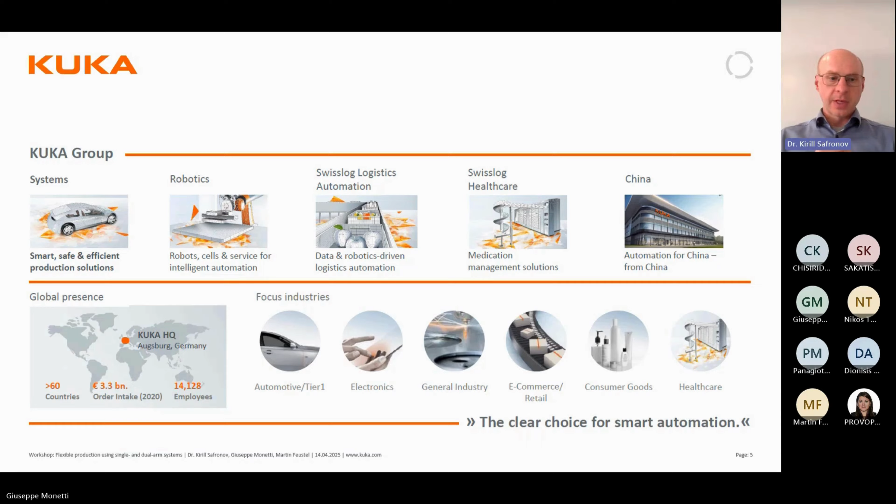Almost in every country we have representatives, sales, and services, but as I said already, the headquarters are in Augsburg.

Right now we have several European projects, and one of these projects is SMARTHANDLE. The KUKA tasks here are multi-arm motion planning, how we can organize the work of several robots together, also path planning, task-based programming, how we can make programming easy to use through task descriptions.

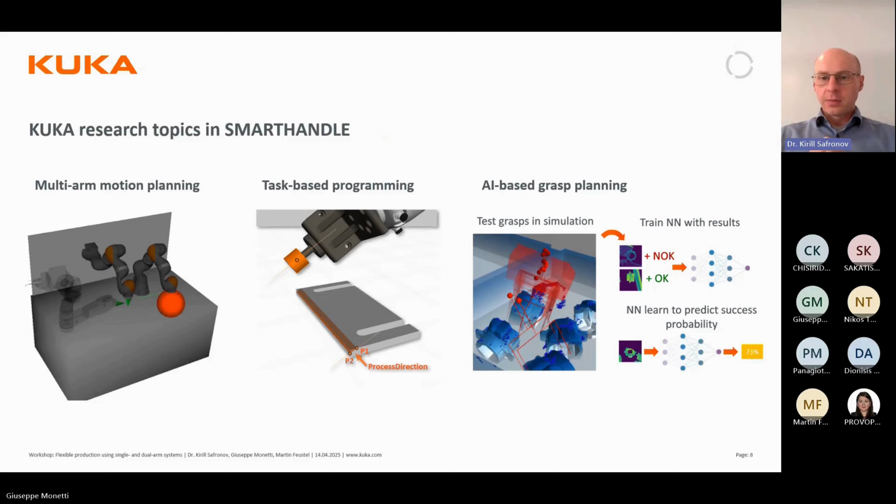And AI-based grasp planning, how can we increase the grasping ratio, the grasping success, not just for industrial objects but in general. Now I would like to hand over to Giuseppe, and he will continue with the first part, dual arm system for aluminum profile handling. Thank you.

Perfect, thanks. I'm starting to share right now. Okay, so I'm Giuseppe. As Kirill introduced me, I'm going to present our work and results in the field of dual arm manipulation, in particular for a specific use case referring to the SMARTHANDLE project.

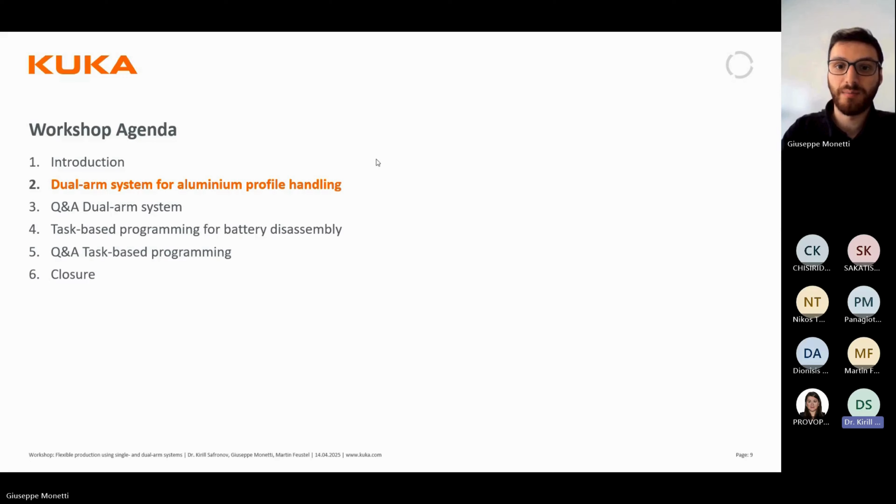That is the one provided by the company Alumil. Alumil is a Greek company, and they are working on production of aluminium profiles of different shapes and different lengths, which then have to be packaged, palletized, put on a pallet, and transferred for delivery.

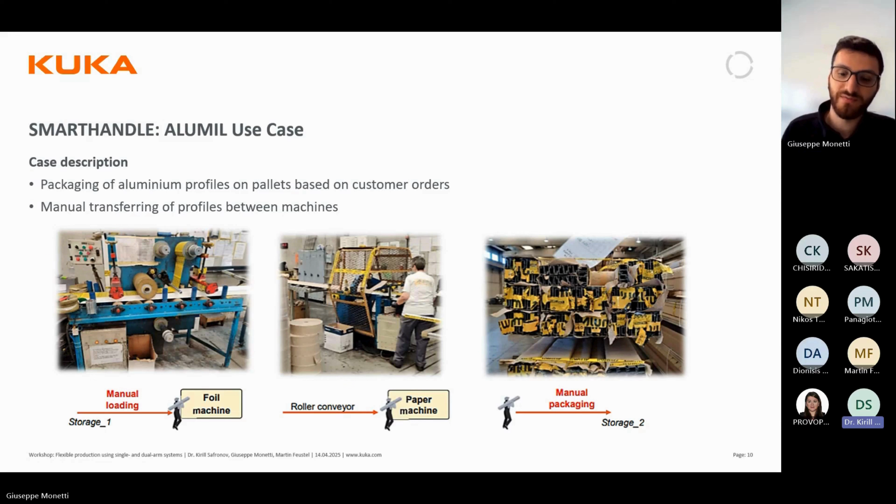Most of these steps are nowadays still done manually by humans, and our objective is to approach the automation of these processes. To do so, we developed a test bed for our technology that we are going to provide to our partner inside the project.

We set up the current scenario that you can see in the picture. We are using two LBR iiwa robots that, as Kirill already said, are cobots for industrial use cases. These particular robots have 14 kilograms payload each. In our scenario we have two of them with two robotic grippers, each with 3 fingers.

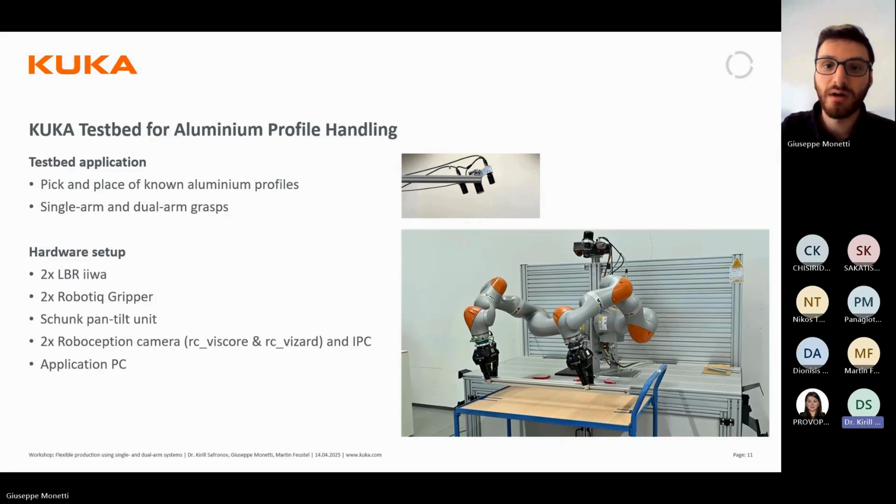Together with two cameras from Roboception: the rc_viscore that is looking from far away on top of the working area, and the rc_vizard placed on top of the torso. This second camera can also be moved using a pan tilt unit from Schunk. Finally, we have an application PC that we can use for deploying and testing all our technologies.

This is what I'm going to explain, how we are able to perform the task that you are watching right now: to autonomously grasp the aluminium profile, recognizing the pose of the profile itself, the grasping, the repositioning, and placing.

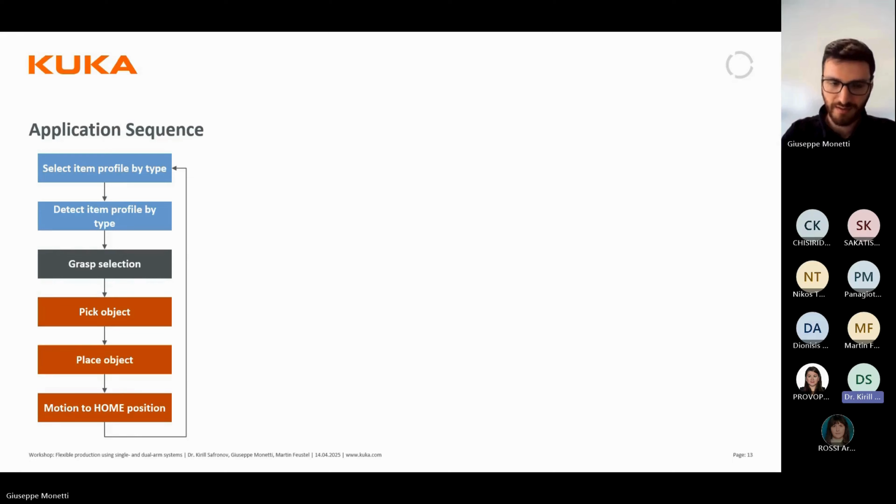The application follows the sequence that you can see here. So we start with a selection of the aluminium profile. This aluminium profile is selected using a small web UI that we developed internally for this use case. We need to specify the profile that we want to handle together with the camera that we want to use.

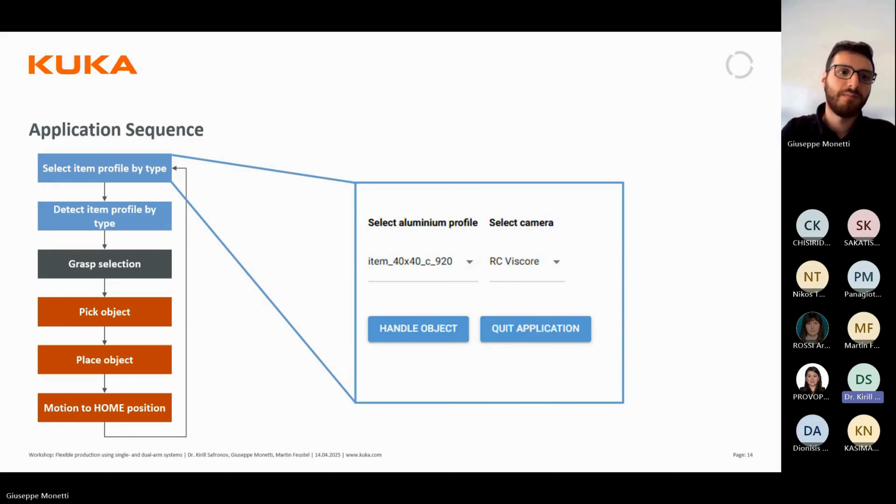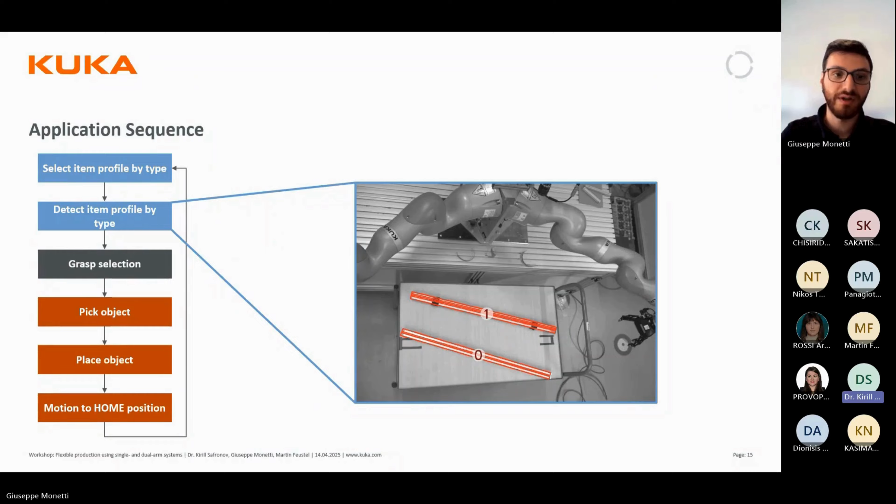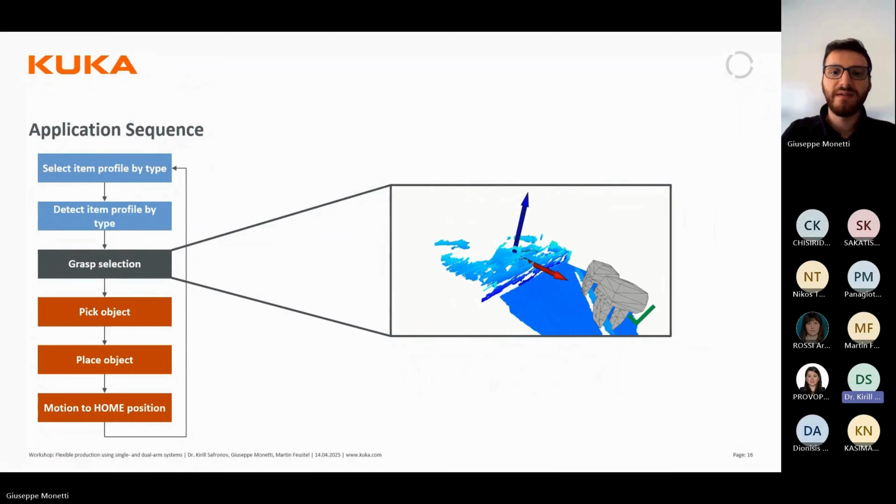After that, we proceed to the detecting phase, in which we find and estimate the pose of the profiles that are available in the scene. After that, we select how to grasp the object, and these steps will be clearer, of course, in a while. But yeah, so we decide how to grasp the object. And finally, we plan and then execute the motion that you already saw in the videos before. So we go on the object, we grasp it, we actuate the gripper as well, and so on.

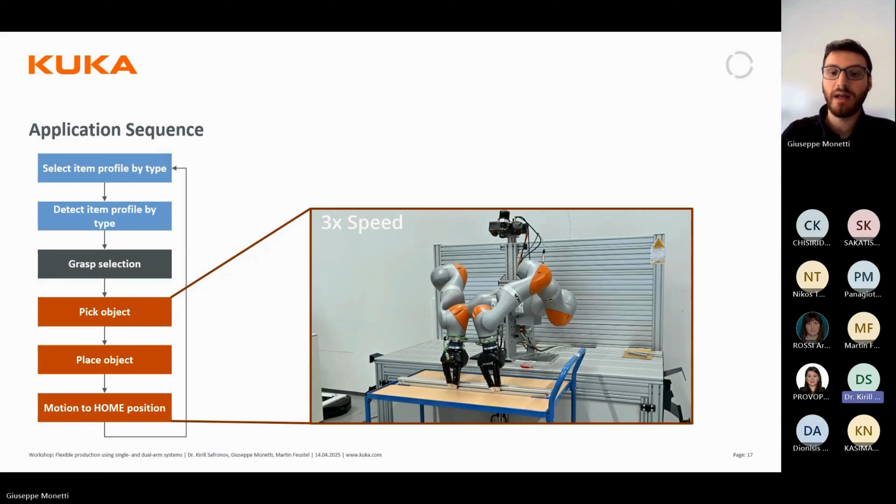So let's start describing part of this application. Let's start with the perception part. Regarding perception, we are encapsulating into a service the Roboception CADMatch functionality. This is a technology that Roboception allows to use with their camera to get the pose of objects that are previously learned by a model that they train on site.

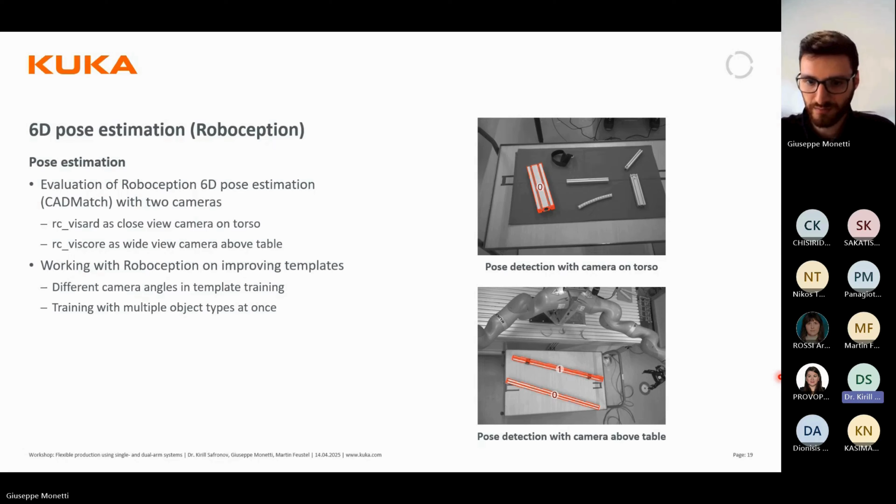So the procedure is we send a model to them. They train their AI model such that they can find the pose of this object in the scene, and then we can deploy that on our system. And we are in a close collaboration with them in order to improve the templates that they give us to recognize the object at runtime.

Then let's talk about the grasping pipeline. So the grasping part is divided mainly in two components, the grasp sampling and the grasp evaluation. Why are we dividing these components in two? Because we can decouple these two logics and try to pre-compute as much as we can. So for example, in our scenario, we have the grasp sampling that happens only once and only at startup. So it's something that does not have to happen at runtime and can take even longer time.

The technology used for grasp sampling will be briefly shown. Here we are using them to generate grasp poses, so configurations of our gripper, and storing them. Then at runtime, what we do is to take some runtime information like the point cloud and the object pose, together with the grasp poses that we sampled and stored beforehand, and we have, after all, a sorted list of grasp poses. They are sorted in terms of score. So the grasp pose that has the highest score is for us the best grasp that we are going to try to perform.

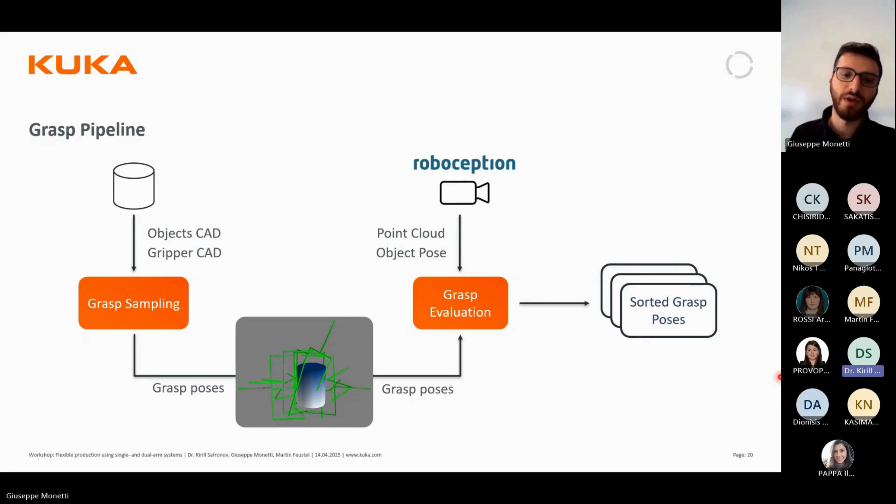And this is how a grasp, for example, may look to us. Assuming that we are having a parallel gripper, our grasp is defined in the object pose and is object relative. So the grasp itself can be computed using only the information on the gripper and on the object. How are we sampling the grasps? Well, we are using two different methodologies. One, the simplest one, is the approach sampling.

The approach sampling is based on a very simple situation. We take the object mesh and we sample points on the surface of the object. Then we approach this point with the approach axis of our gripper, and we try to check if the object is between the fingers. If this happens and there is no collision, perfect. We have a grasp sampled for this object.

A methodology that is a bit more complicated but also gives better results is antipodal sampling. In this case, we are still taking our object, the mesh of this object, and sampling points on the surface. But then we use these points: in particular, we sample one of those and compute the normal of that point on the surface of the object. Using this information, we can try to project this point on the other side of the object.

Why? Because we are trying to find two regions of the object that can be used together for grasping, so a region on one side and another region on the other side. If we are able to find two regions like that, it means that we can approach these two parts with the two fingers of our gripper. And this is how we sample using the antipodal methodology. We then use these grasps only if there is no collision between the gripper and the object itself.

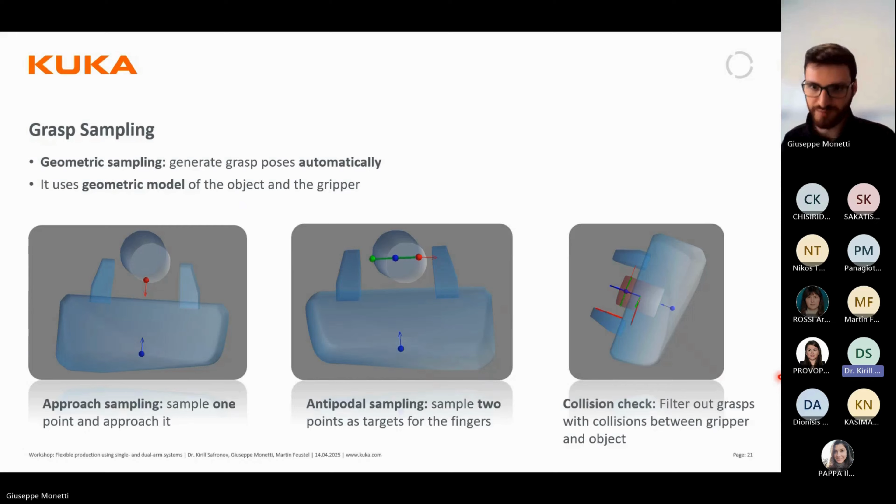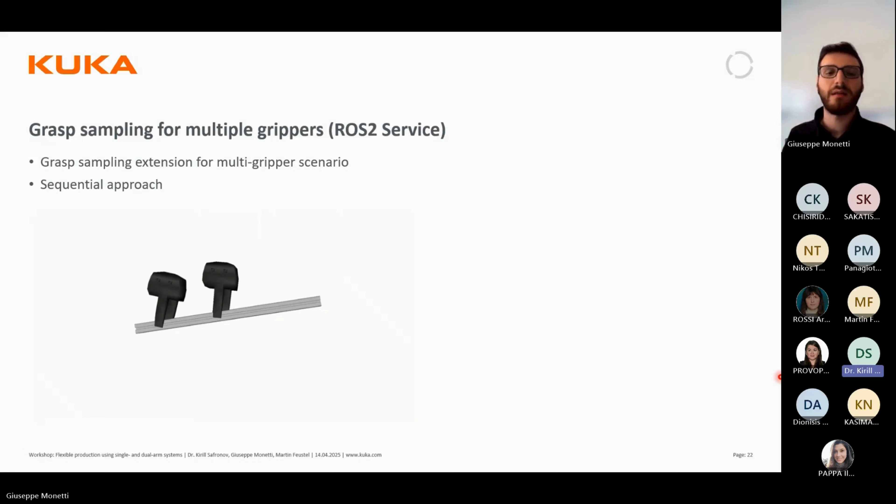The approach that I just explained works just fine for one object, but how do we enhance this approach with multiple grippers? For example, in this case, you can see some grasps sampled for this aluminium profile. The way we do so will be shown in this simple flowchart. We start with loading the object model, and using the object model, we load also the gripper, and we try sampling one of the poses of the grasp.

This means we can use one of the methodologies that I showed before, the antipodal approach or the other approach. After we sample the grasp pose, we check if we are in collision with the environment. What do I mean with environment? In this first part, I mean simply the object itself. So we are checking if we are in collision with the object.

If we are not in collision, we proceed to add the gripper to the environment. So we have sampled one of the grasp poses of the gripper, and we then proceed with the sequential steps. Otherwise, we try again with the same gripper. If we finished with all the grippers, then we are good to go. But if this is not the case, we add the second gripper and we start again.

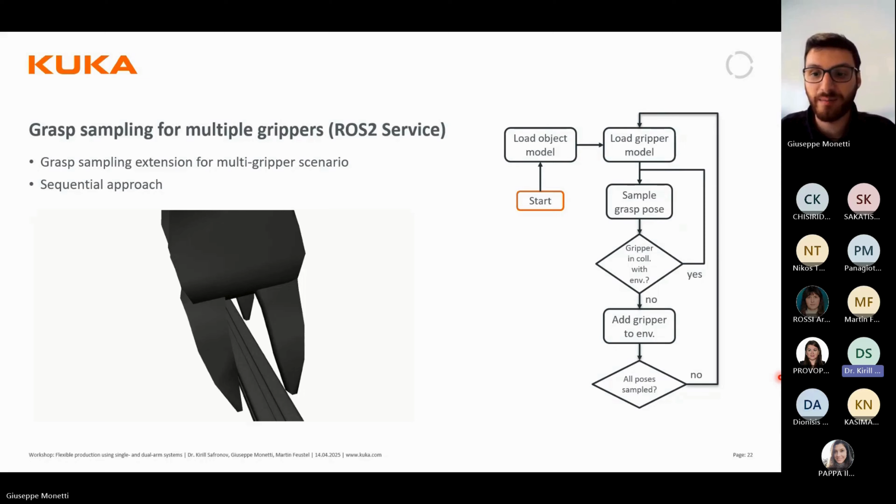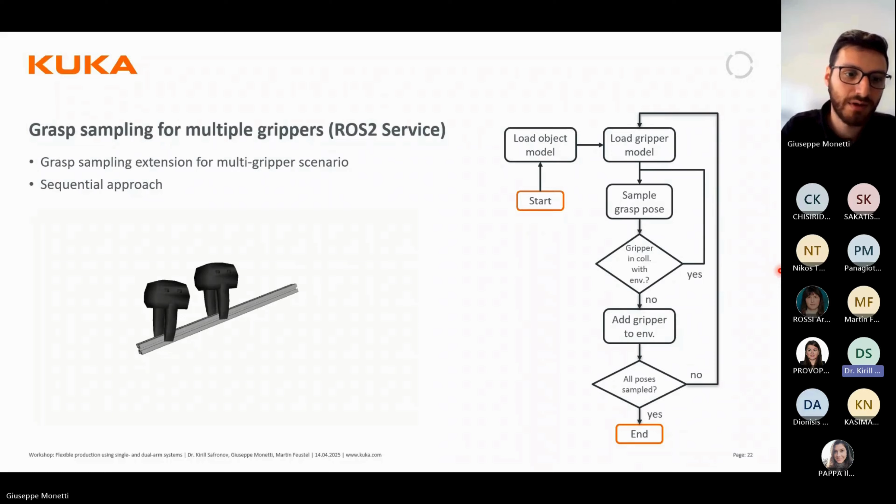So with the second gripper, we sample some poses and we check if it's in collision with the environment. In this second case, the environment is represented not only by the object, but also by the first gripper. And this is how we finish the algorithm. If we sample a pose for each of the grippers required for the grasping, then we have our multi-grasp sampled.

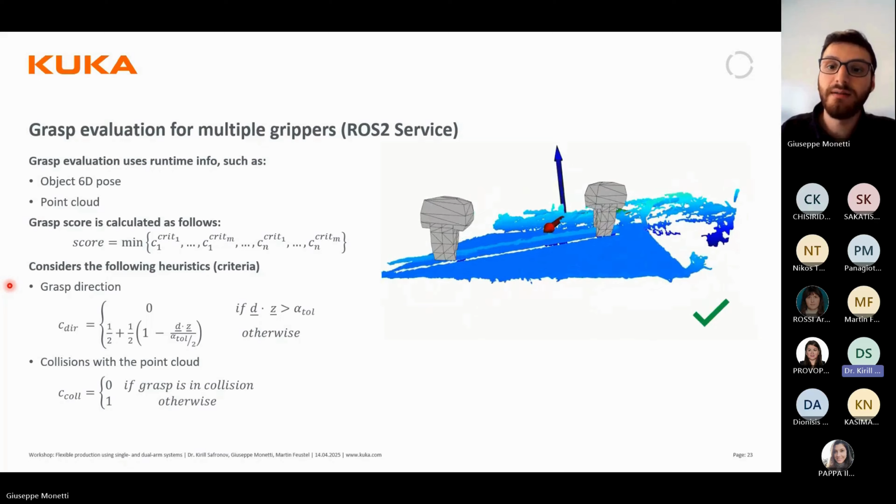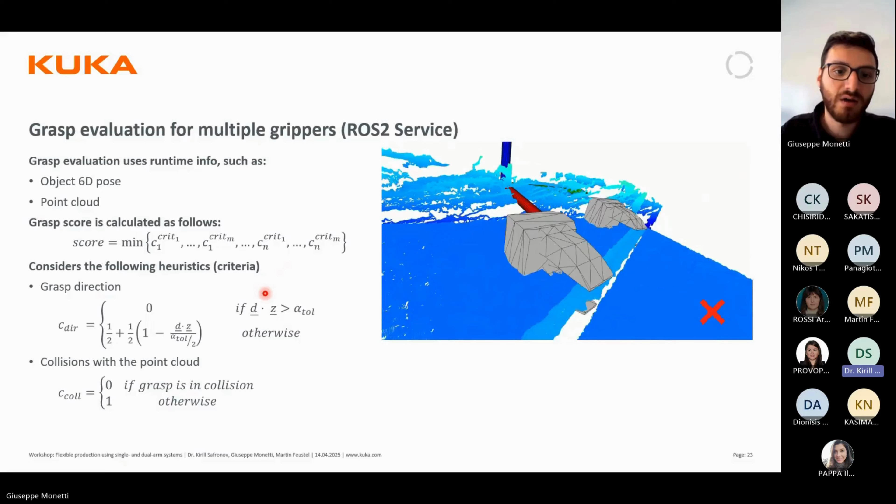The criteria that we are considering right now are the grasp direction. We define a desired direction D, which in our case is the z-axis that you can see in the videos here, the blue axis. That's the direction that we would like to grasp from. Given that, we assign a score of 0 if we are approaching the object from a completely different direction, and we check it via a tolerance. Otherwise, we compute the score using the following equation.

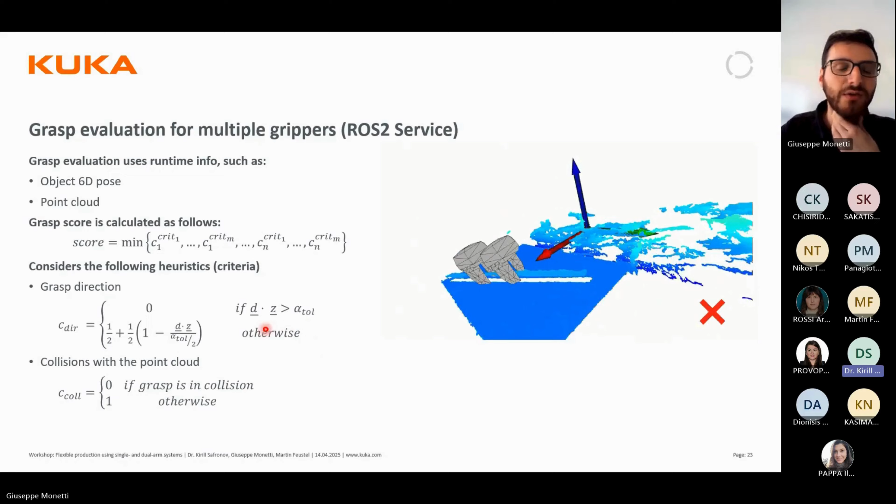It is a linear function of the angle between the approach axis of the gripper and the desired direction. This score goes from 0 to 1. The same applies for the collision. We have another heuristic for that.

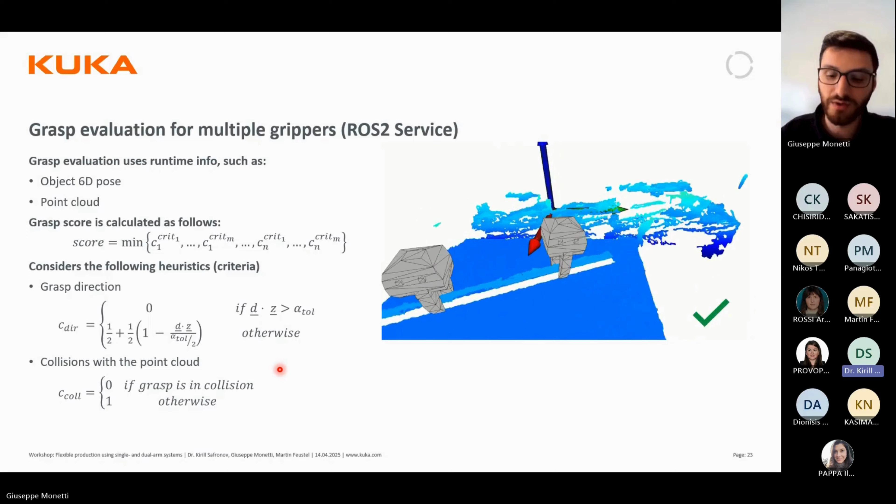That is very simple: 0 if the gripper is in collision, 1 if it is not. In this way, we are able to find grasps that are aligned to the direction that we would like to have and are collision free. Of course, other criteria can be added, and we are working on that, like, for example, the stability of the grasp or the weight distribution, and more.

Then, after we decided which is the best grasp for the object, we have to plan the motion. For doing so, we use two components. The first one is inverse kinematics. We know where the gripper should be placed, but actually we don't know which joint configuration for our robot is the one achieving that pose of the gripper.

So what we do, we use a quadratic programming-based inverse kinematics approach. So we use a QP solver to find the desired configuration of both manipulators. And then finally, we use Open Motion Planning Library, OMPL, to plan a collision-free motion from the starting pose to the grasp pose.

OMPL contains the implementation of plenty of sample-based algorithms, like for example RRT or PRM, and all the variants, for example also RRT star. Moreover, we can check for collisions and also do some distance checks if we need distance information using libraries like FCL and Coal.

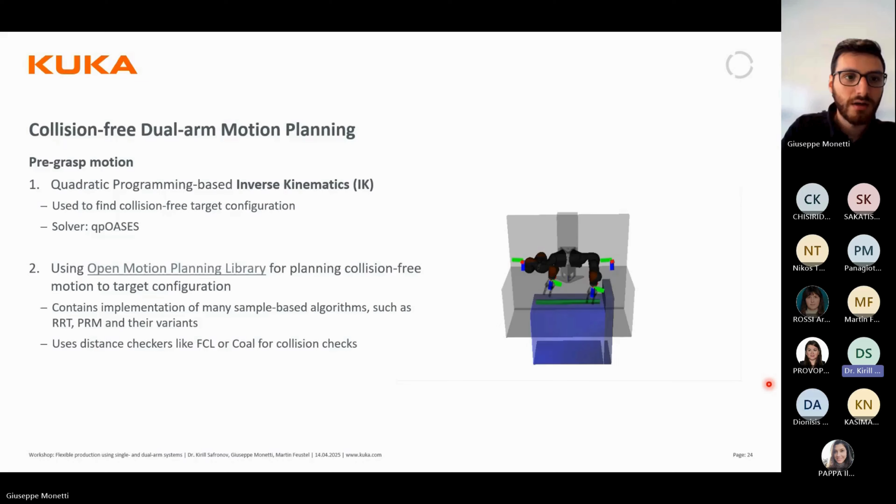But the QP-based approach is not used only for the inverse kinematics, but also for the final part of the motion, or the part that is nearer to the object. Once we have a motion that is collision-free and is above the object, what we would like to have is to go down straight to the object itself.

To do so, we are performing a linear trajectory, and we are injecting a trapezoidal velocity profile on top of this trajectory. Again, it is a Cartesian trajectory, so we need to find joint configurations that are able to perform this Cartesian space trajectory. To do so, again, we use our QP-based approach.

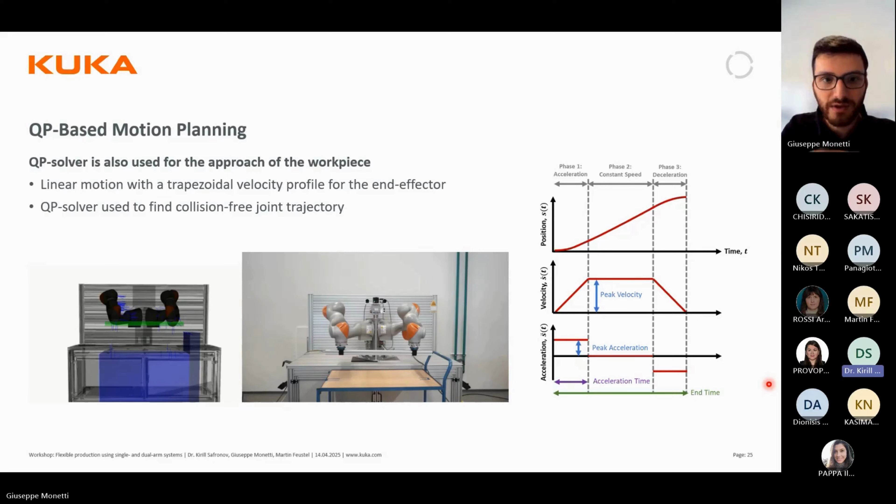More details about the QP-based approach, and in particular how to enforce Cartesian constraints, will be addressed by my colleague Martin in the second part of the presentation.

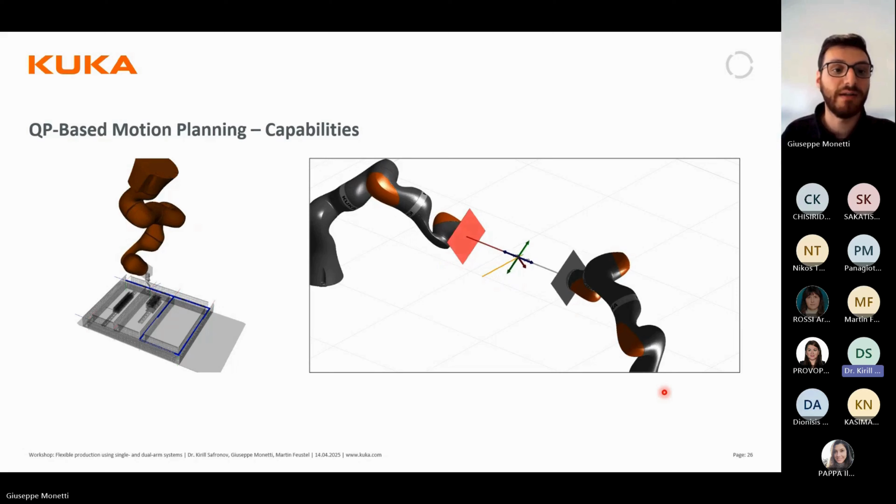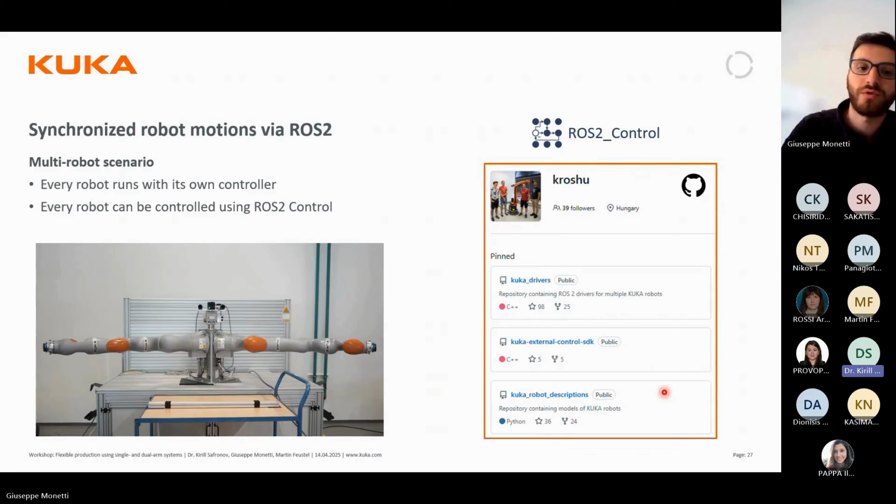Then finally, when we have planned all our motions, we are ready to execute them. To perform that, we use ROS2, in particular the ROS2 control framework. And we are using the open source KUKA drivers developed by our colleagues in Hungary. They have the set of libraries that you can see on the right side on GitHub, and with minimal adjustment, it is possible to use this library for synchronized execution of motion on multiple manipulators.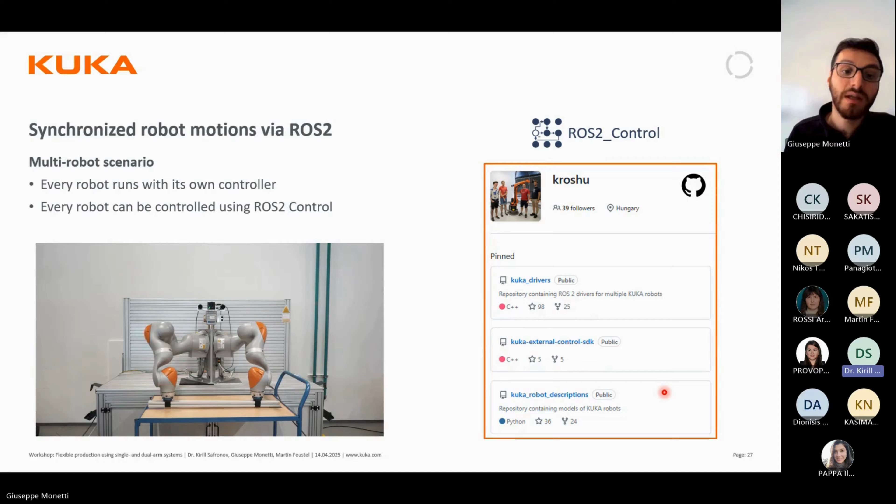Why is this important? Because simply we are not in a scenario in which all the robots are connected to a single controller. Every robot here is controlled by an individual controller, and that means that it's not guaranteed in every moment that the motion is synchronized. But using the tool developed by our colleagues, together with ROS2 control, it is possible to perform synchronized motion on multiple manipulators.

We are working on several parts. One of those is the motion planning. We are planning right now motions individually for each manipulator. So even though we are using them together and we are planning the motion together, so we plan joint values for all the robots, we are not planning this independently of the robot itself. We would like to plan the motion, for example, of the aluminium profile, and then independently of the kinematic chain that we have, we can perform the motion.

To do so, we can use our QP-based approach together with some other technology that our colleagues are working on, in particular the ScLERP algorithm, that is a screw linear interpolation. So using screw theory, it is possible to interpolate frames such that they're consistent along the motion.

An example of the problem that may arise using simple linear interpolation is shown in the figure here. So if we define two different frames referring to the same object, and we interpolate the motion between some key points, for example here, A1, A2, and finally A3, we can simply interpolate those frames and have a Cartesian trajectory out of it.

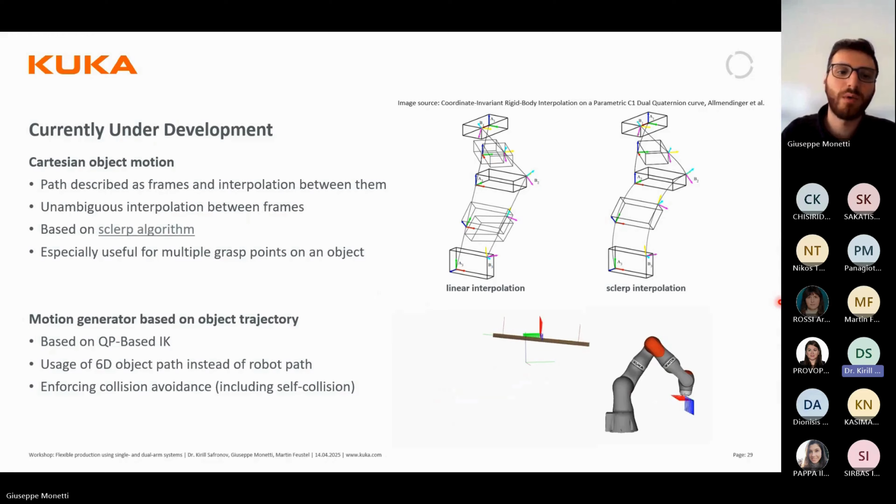What you see here on the bottom part is some initial promising results using this interpolation technique in simulation. And we are going to integrate this into our setup. Finally, what are the challenges that we are going to address in the near future? One is the pose estimation.

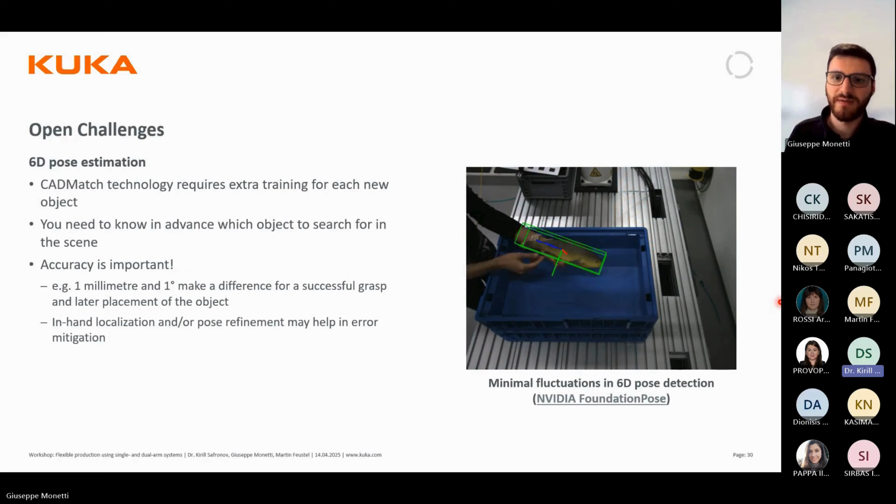So the CAD-match technology provided by Roboception is based on the CAD model of the object itself and requires training every time we want to manipulate an extra object. So it means that we have an overhead every time we want to add an object to the set of objects that we want to handle. To solve or mitigate this issue, there are several approaches that can be found in literature, but moreover, another important problem that we want to address is the accuracy,

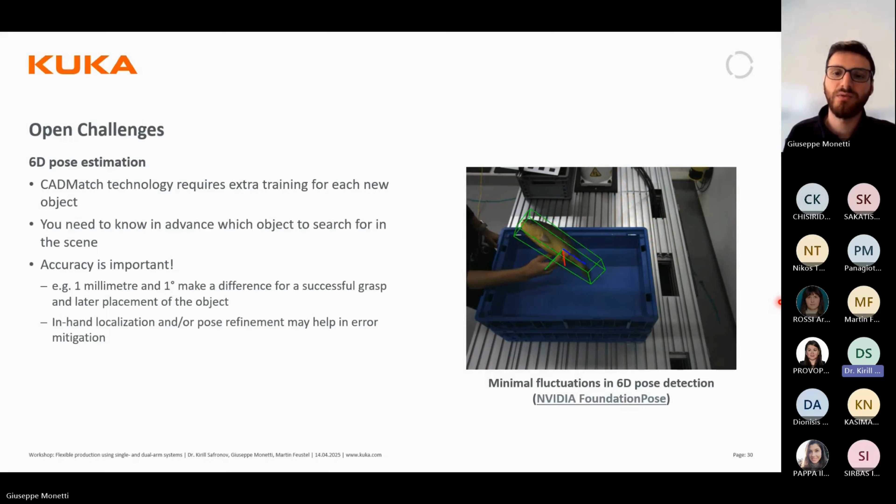because some error in the 6D pose estimation of the object may lead to a wrong or an inaccurate grasp strategy that brings them to an inaccurate placement of the object into the placement position. And that is, in our case, an important problem to address.

Then also the grasp sampling itself is using right now, as I showed you, geometric-based technologies. We are working at this moment on evaluation of several AI-based solutions. Why? Because AI-based solutions may reduce the amount of grasps that we need to sample to have sufficiently high quality of the grasp itself.

Because what can happen? It can happen that we have sampled, I don't know, 100 grasps or 500 grasps for a specific object, but by luck, all those grasps are then not of high quality. What do I mean with high quality? Well, it depends. Right now, we are checking only for collision in our sampling, and it means that the grasp itself may be not stable.

Using zero-shot technology or few-shot technology, like the one based on diffusion models, can improve the average quality of the grasp itself and also reduce the runtime cost for evaluating them.

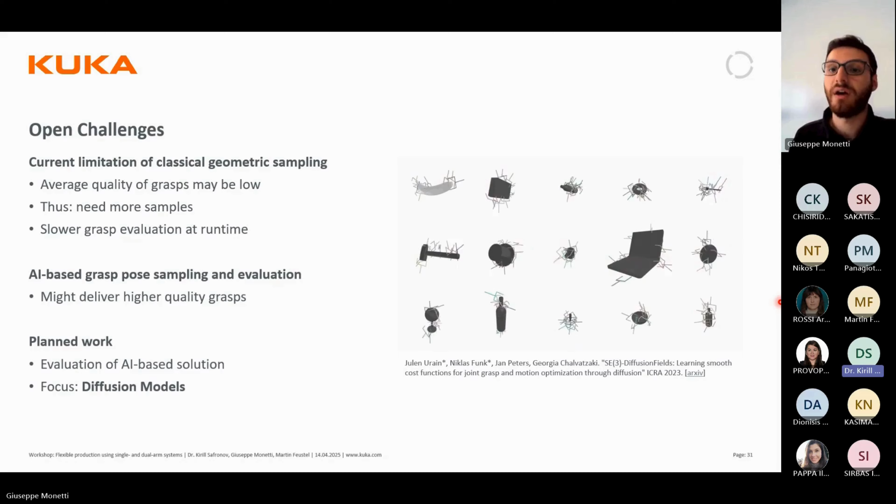Finally, we are trying to tackle the problem of deploying robot applications also in a modular and innovative way using a service-based structure. That's something that is more than known in web applications and in several domains, but in robotics it's getting more and more useful. But this implies also problems.

For example, in a simple monolithic application, okay, we have a big monolithic complex application, but the component is just one. Here, when we have several components, as we showed you at the beginning of this presentation, we have also the burden of maintaining the communication between them, and we have the complexity of the networking as well. And it then gets harder to debug one of those individual components, one of these services itself.

Moreover, we need then orchestration. That is a new task, something that can be approached using, for example, solutions like Kubernetes that help, for example, ensure availability of the services, and this together with Docker may make it possible to have reliable applications, where if a component by any chance crashes, we can make it turn on again and available to the user again.

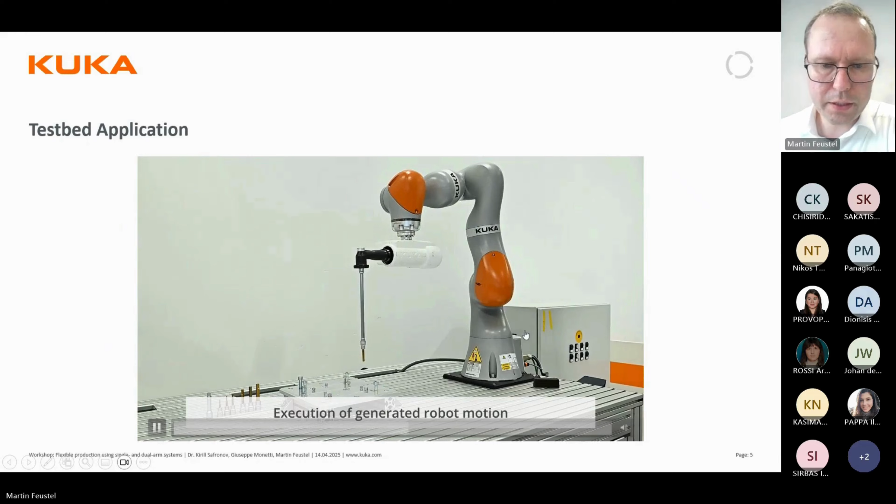So it's starting. What we are doing is moving to one of the screws, moving down, and after that we have a retreat motion. The screwdriver is currently not actuated, but this will be done in the future, by the end of the project. And as you see, that's really quite simple.

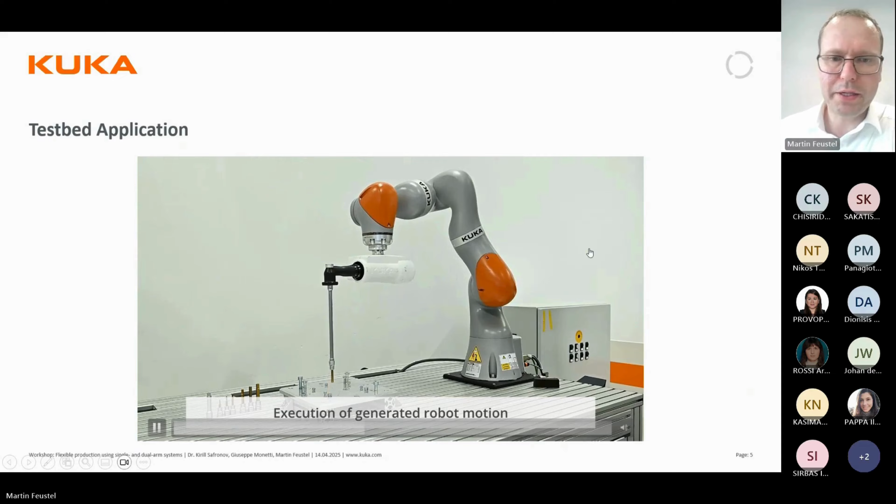So if you ask an application developer, he will say, okay, I do that quite easily. How that's done and what we really have behind for the motion generation, I will explain in the next 20 minutes.

So you have some PTP and some linear motions, and that's how you normally program the robots. This is the standard way, not only at KUKA, but also at ABB, Fanuc, and so on.

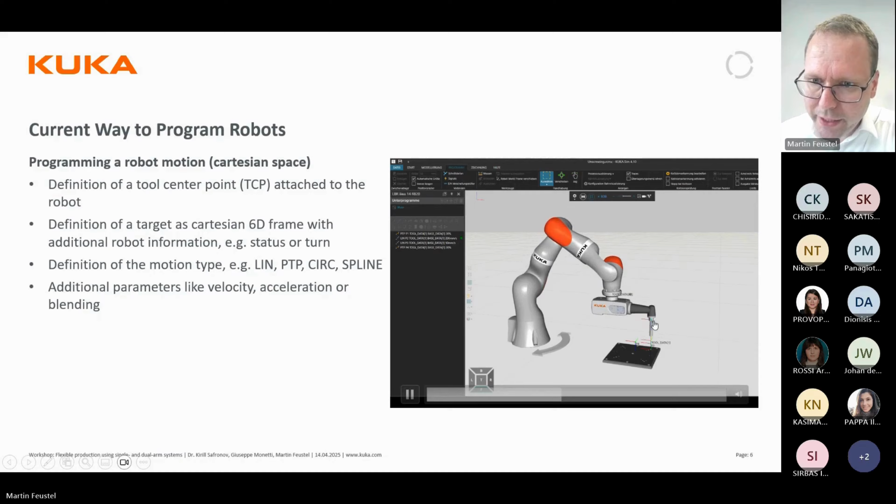So the main thing you are doing is teaching frames. You are defining the motion types, so linear motion, circular motion, PTP in joint space. And you also have additional parameters like velocity, acceleration, or this blending, so it's not directly reaching P1, but blending over to the next motion.

So if we look from above in an abstract way, we have the complete path here, we have the tool we want to move along this path, and then we have these frames. If we make it a bit more complicated, we start here, our TCP is currently here, and then we continue, and then we are at some point, and then what happens very often is we cannot perform the motion.

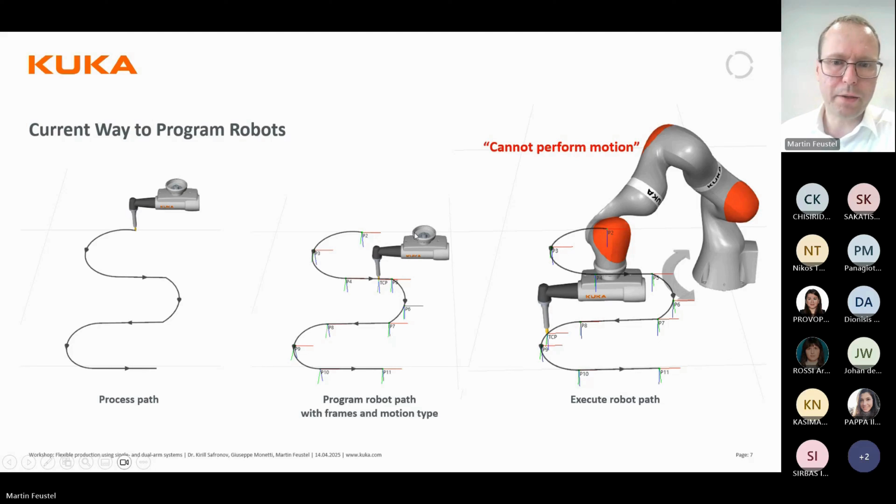The reason for that is that we are reaching the workspace of the robot, or even more, the axis limits. So it's not possible to move to the next point on this path. And that's very sad for the application developer, because if you are here and you cannot execute this motion, you have to start here and reteach all these points. This is only 3-4 points, but you have to redo it until you find a solution that you can execute completely.

The reason for that is that this programming we are currently doing is over-specified. So I have one screw here, and we want to reach it with one frame. And if I rotate this screw now, I cannot even reach this screw or bolt anymore, because it's out of the workspace of the robot. The position is the same, but the screw is rotated around, or the bolt is rotated around 180 degrees.

And that's the issue. We don't need this rotation around this blue axis here. We don't care about that, but we have to care while we are teaching it. And additionally, because we have here a 7-axis robot, we are additionally also teaching more than 6 axes, more than this point here. We need additional information like this elbow and the tip, what angle this is, because we want to reach this point with always the same orientation and the same robot configuration. For that, we have to teach this point, this frame, as a 6D frame plus robot configuration.

And this makes it, of course, very inflexible for processes. So if some parts are rotating, we are not using some robot redundancies, or here, process redundancies - I will explain that on the next slide. And we are also not using CAD information, so we are also not using collision avoidance. We program, and then at the end, you deploy it on the controller and check by hand if it's in collision or not.

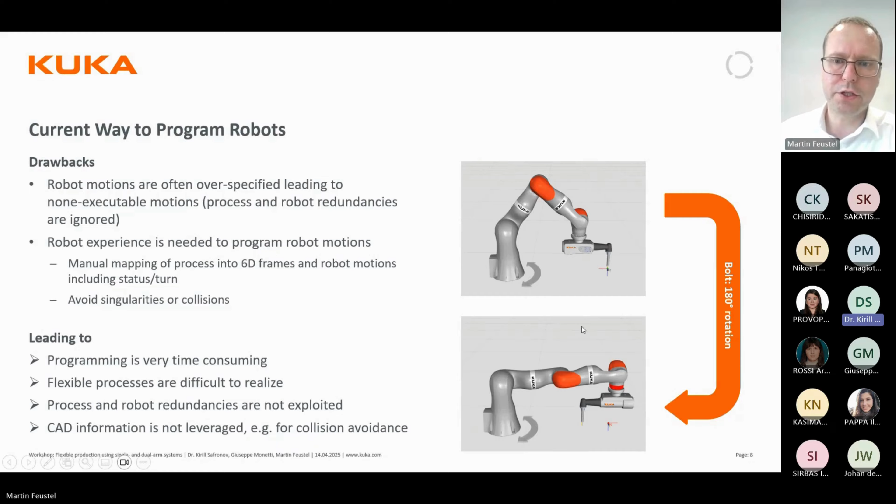So about this redundancy: robot redundancy means that you can reach one frame here, at the top of this bit, with multiple robot configurations. This is possible if you have a 7-axis robot, or if you have a 6-axis robot with some rotation tilt or linear axis, or if you have a mobile robot with an arm on it. So this happens quite often.

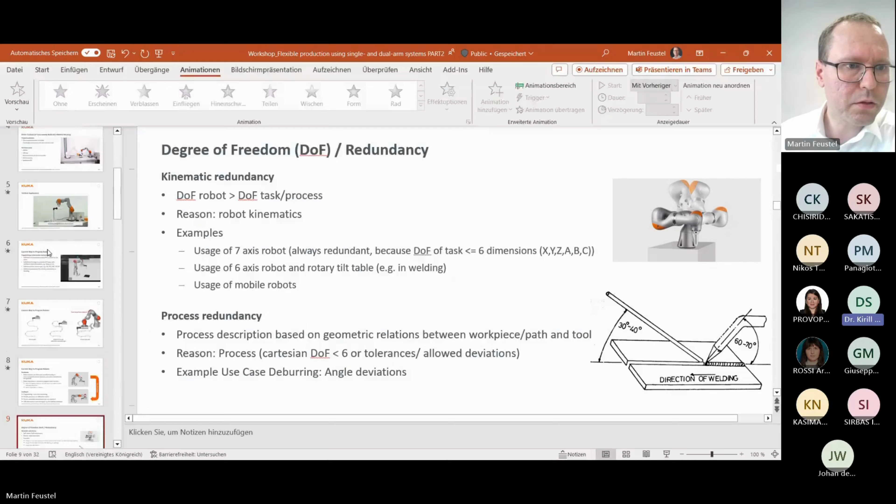But I had it. So what we did then is, we said okay, if the frames are limited, then let's unlimit this frame. So it's possible now to say, okay, that we are moving.

This is really, I have some technical issues now. Sad. Let me see. I'm not sure why they are not working.

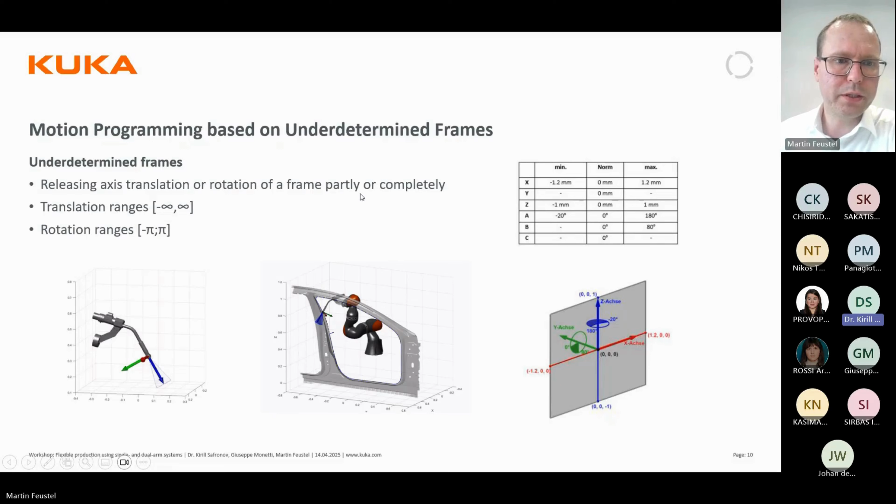What we did is we say, okay, it's now possible to have these ranges. So around B, it's possible that we have some rotation, or X and Z. More processes are there that we can free them. So one thing could be that we are in this range here, and it can be somewhere. This is possible, but this has also some limitations, this programming style with underdetermined frames.

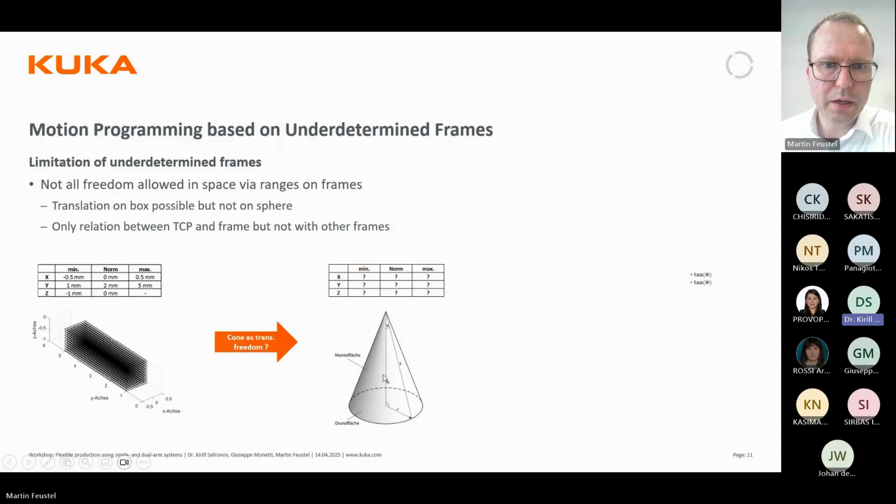So if we want to describe that your TCP is somewhere inside this cone here, how do you then write this? You can only say X, Y, and Z, this is what your frame is. And then at the end, you have some equations inside. And this is nothing we can give to a user.

So for simple use cases, it's possible to have some ranges for X, Y, Z, or A, B, C. For example, in our use case with unscrewing bolts, we can say the rotation axis in the Z direction, in the direction of the bolt, is unlimited, and then we find more solutions. But if it's getting more complicated, it's not a solution.

For that, there are some research institutes doing it differently. They have programming techniques based on constraints, especially geometric constraints. So what they want to do is put a bearing on the stuff here, and what they are selecting is coincidence. They're saying the bearing must be coincident with this stuff here.

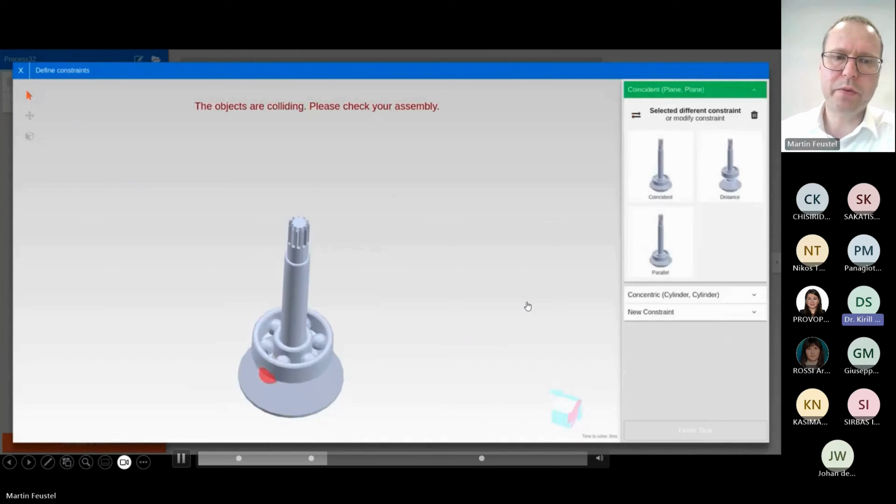And with that, they are describing some constraints, and these constraints automatically generate a path. So you see it here, we have a robot. First thing they are doing is closing the gap between simulation and reality, so they exactly know where the objects are. And then they generate a path out of these geometric constraints.

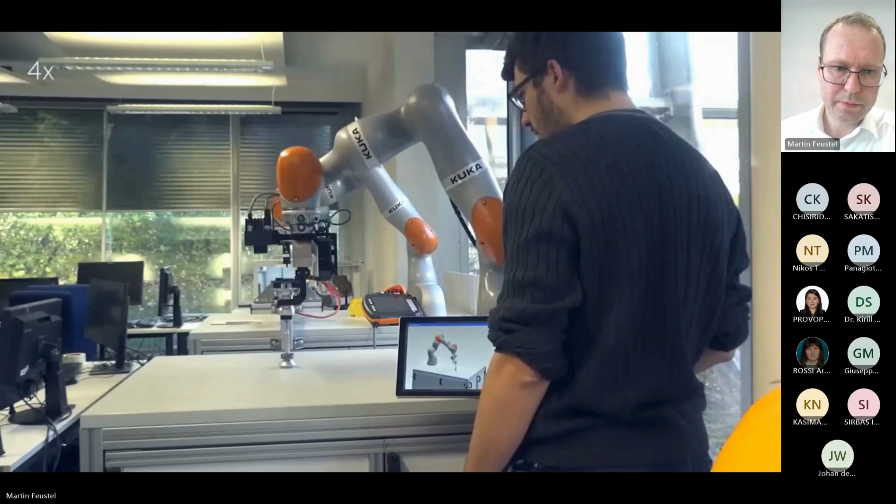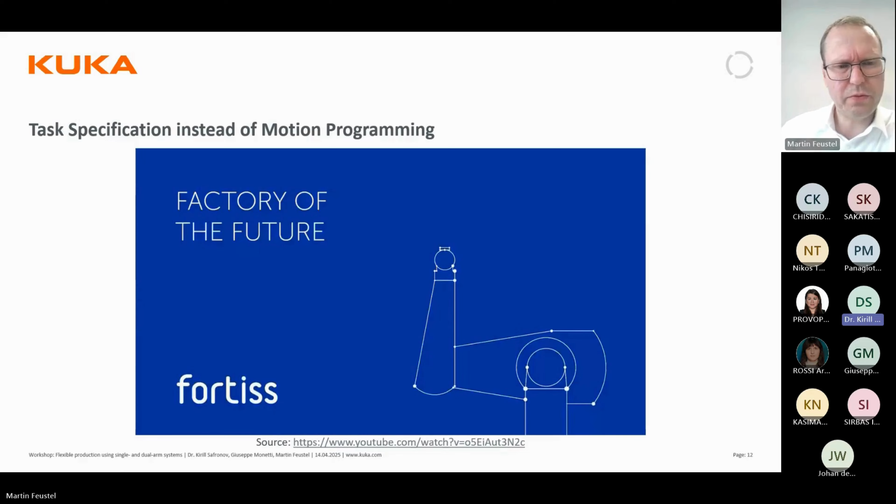And this was from fortiss. fortiss is a research institute from the Bavarian state, and they are doing more things in this direction. We also saw this, I'm not sure, in 2014 or 15, and thought, yeah, really cool idea.

We want to have it because with this technology, you have increasing flexibility. You have process redundancies. We think the programming time will be reduced because of these process redundancies. And most importantly, of course, non-robot experts can program. So you need process experts that can program.

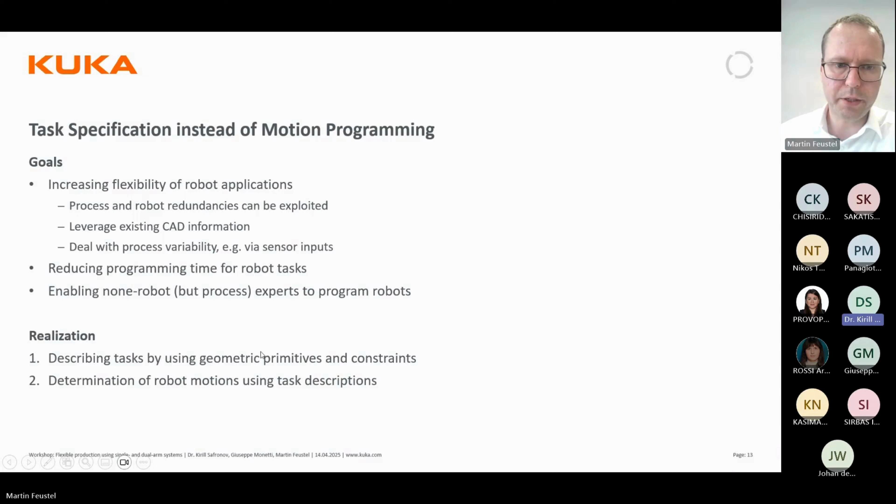And to realize that, we need two things. We need one thing regarding UI and programming, so we need geometric primitives and constraints that the user can configure. And on the other side, we need algorithms to solve this task description, described by geometric primitives and constraints.

So this is how this structure looks like. We have on one side our simulation with the task description, with the geometric constraints and so on. And on the other side, we have our smart motion generator who solves these constraints. Then the scene is synchronized automatically via a distributed environment model. And then in the IDE, you can request the robot motion, sending the task description, and the solver sends it back, and you have it in this robot simulation, and then you can execute it in simulation and later on the real robot.

So what we need first is geometric primitives. There are a lot of primitives in different CAD tools, but they are not standardized, so you have different descriptions for a cuboid, for example. In another project, we did a canonical representation of these primitives. So even at KUKA, you will find different primitive descriptions for a cuboid, for a cone, and so on. That's normal, but we defined a canonical representation and implemented it in the robot simulation IDE, so the user can configure it. So this is the first thing.

The second thing is geometric constraints.

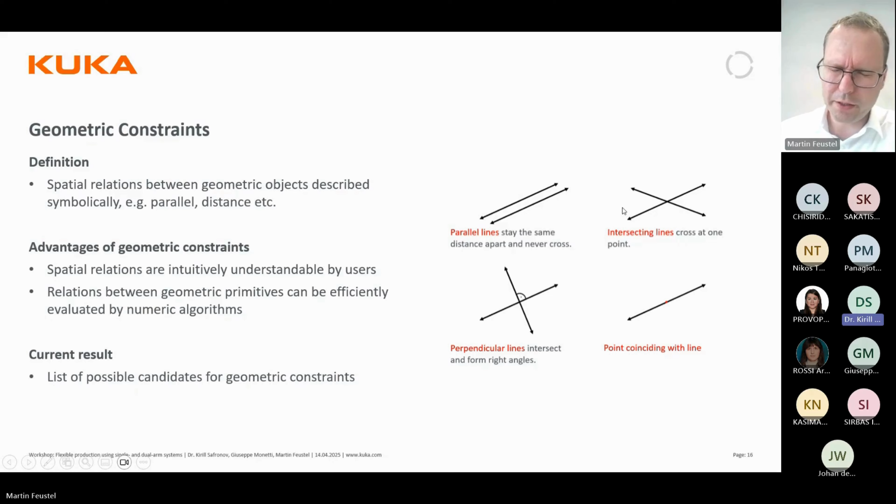The third thing we need in our IDE is that we can move these primitives. For that, we developed a spline and a corresponding velocity profile. For the spline itself, it has some nodes - these are some positions - and then first and second derivation at these positions. This information, in combination with the interval type, generates this path. Here you see this Hermite spline, fifth order, with these points.

On the points you have the first derivation, and in combination with the second one, you can define the whole path of the spline. That's one thing. The second thing we want is to move a point on the spline with a velocity profile. For that, normal ones are trapezoidal velocity profiles, but those are a little simple, so we have a better one: a sinus-based acceleration and deceleration profile that moves this point along the spline and uses it later for our geometric constraints.

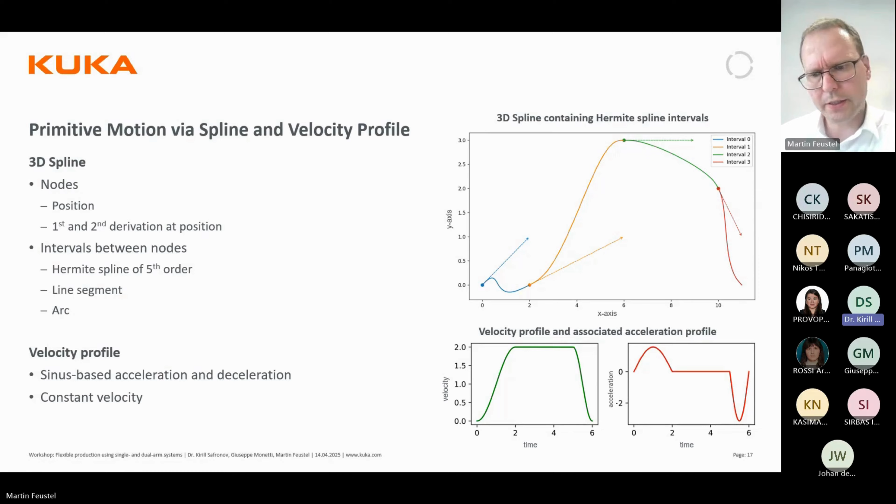Here's a prototype from us, from a bachelor thesis, where you can see that the spline is currently configured with these positions and then with the type. So we have the spline type, and then these points are set up as you want. For example, now it's selected as a circular or arc type. This is done, and then you can define the spline with it. In the future this will of course be done in the 3D tool itself, but for a prototype this is quite valid to have.

That's one part of it. If I jump to the second part, the velocity profile - let's go here, it's a little bit involved. So we have a velocity profile, and there we can add some accelerations that we want to have. We have here at the beginning an acceleration to 200 millimeters, and then we add a second acceleration to 180, so a deceleration.

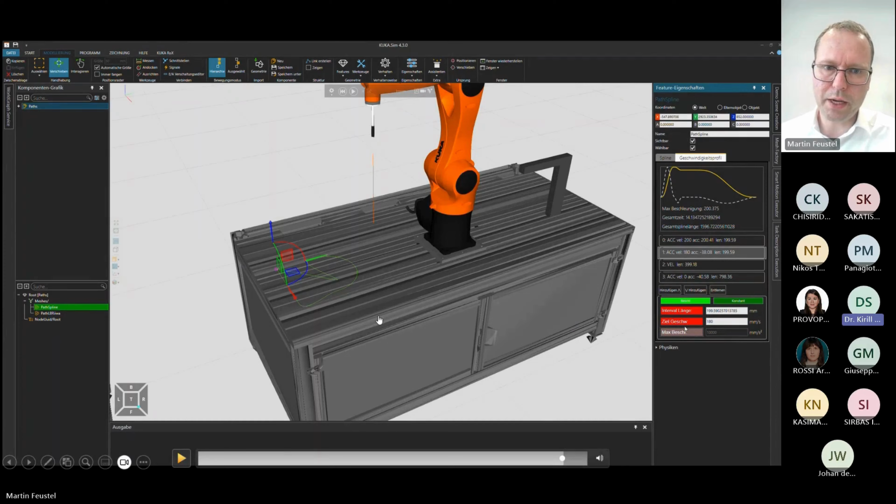So we have the acceleration here, this first part with a length of 200 millimeters. Then we have the deceleration to 180 with a length of 200 millimeters of the complete spline. Then we have 400 millimeters of constant velocity, and then 800 millimeters of deceleration. With that, the spline and the velocity profile are generated.

So the last thing is the task description. There's a process path, geometric constraints based on primitives, and stop conditions, and I will explain it step by step.

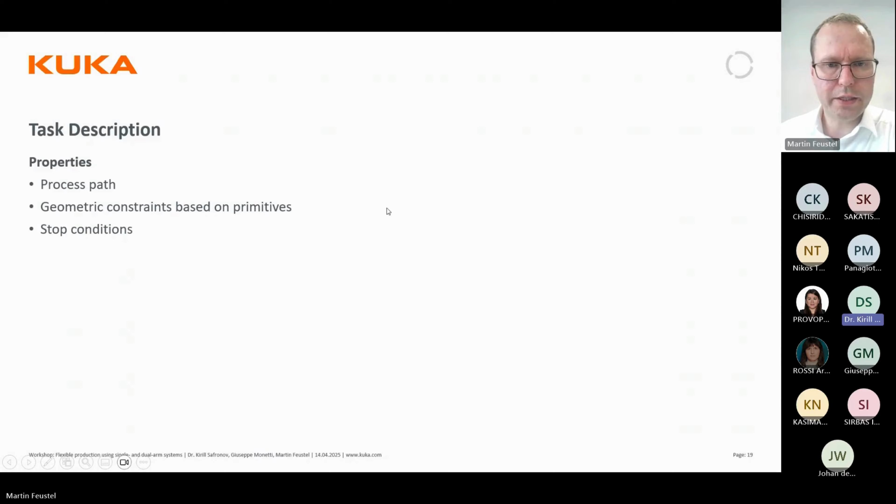So if we have this screwdriver here and we have the bolt here, first thing we want to do is move the screwdriver along a path - this one here. For this path we have a point, so at each moment this point moves over time, starting from here to the end of the path. So we have the path, we have the corresponding velocity profile, and this is the current time used for the generation, giving us the point on the path.

What we are doing is saying this tool point and this point of the path should always be coincident - they should be over each other, at the same position. This generates a motion starting from here to the end, from the tool at this point to the bolt, and with this time it is triggered that the complete tool is moving.

Second, we have a rotation axis, meaning that this tool should always be parallel to the bolt. The last thing is that we have a stop condition: if the velocity profile is completed to 100%, then we stop this motion.

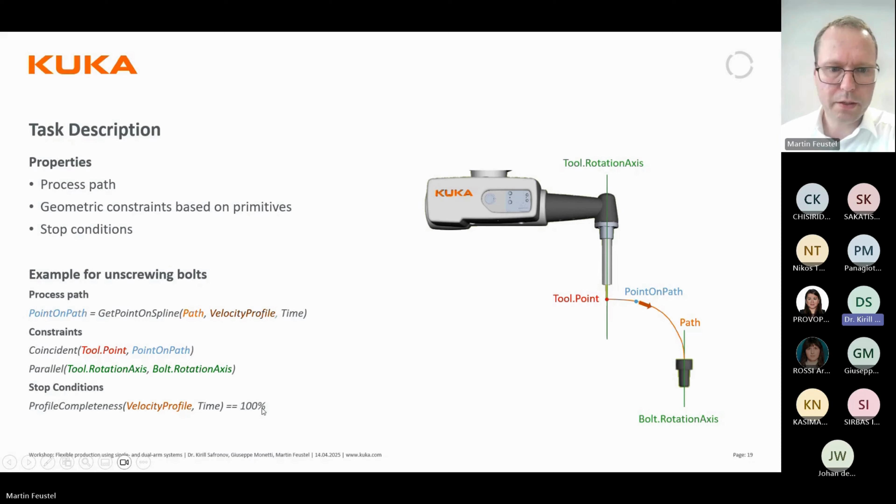And to see the difference here, if you only have this tool point here, then you have a tool and it's moving along this path here. We are going a little bit more down because of impedance control. And then we are moving to the right.

And if you look at the other side, if you additionally have the parallel constraint, then you are always sure that your tool is oriented correctly. But still you have the freedom to rotate around this rotation axis. So this is not fixed, but it's fixed that you are parallel with the tool to the screw. So that is one part. So this was the UI part, left part.

Now we are going to the smart motion generator, especially this QP-based motion planning that Giuseppe mentioned already. So what we have here is a robot, and there we have axis values. These are the Qs, and we have this X, Y, Z, A, B, C. That's the point at the flange. So if we go a little bit over it here, you see we have this point at the flange. That's interesting for us. That's what we want to move in Cartesian space. And to move that, we need certain axis values Qs.

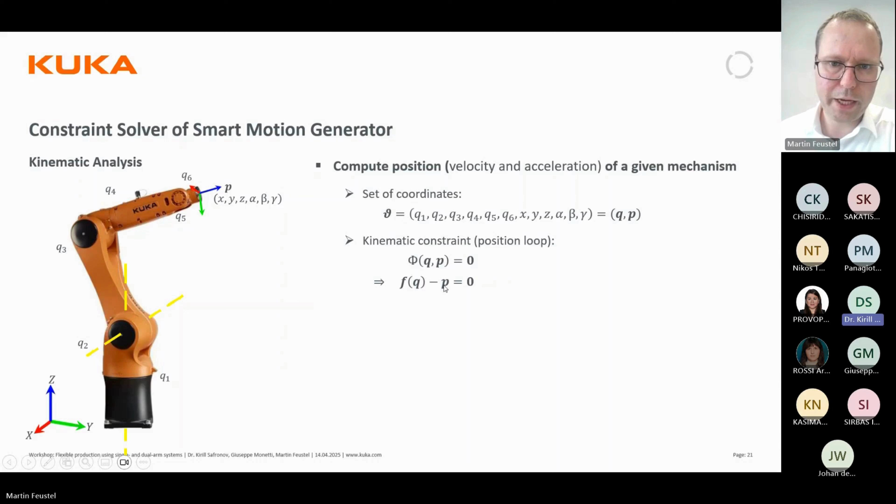And what we have then here at the end as equation is a function of these axis values, and the result of this function must be the same as the position that we want to have. So it's 0 at that point. This is the first equation, and the second equation is about constraints. So we have some constraints that are based on this Q and P, so on this point here. We call it point of interest. And they should be in some ranges.

And if you derive them via time, then you get normal equations that you know. So this one is then the Jacobian matrix. You have the velocity of the axis values. So this is known in robotics, a standard thing. P is derived to, of course, velocity. And at the corner, we have a partial derivation of our constraints with respect to the axis values Q, and also our constraints derived with respect to P.

And what you can do with that, you can combine them, of course. So this one here can be set inside here. Then you have this equation. And at the end, it's a new Jacobian that defines that it should be in range. So that's very mathematical. Going a little bit into how to get the constraints inside this mathematics. What we have at the beginning is parallel, a line should be parallel to another line. That's what you can do from the UI side, and it's understandable. Then you have the equations for that too.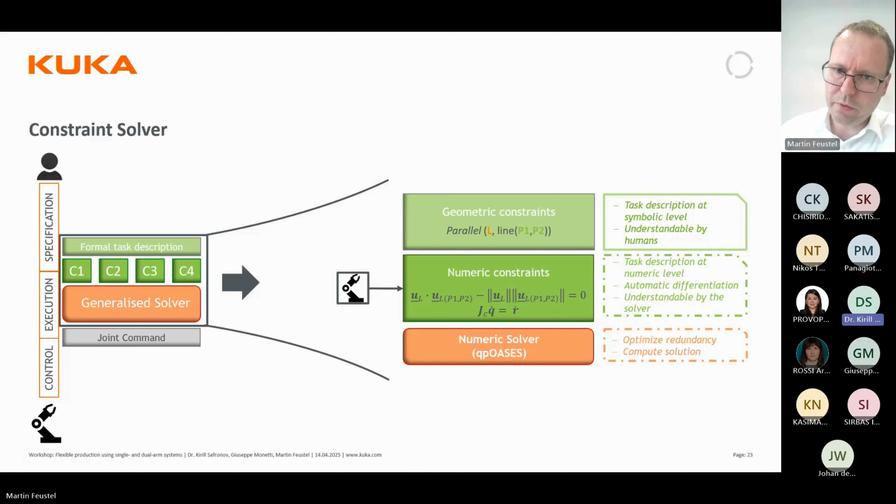And that solver is based on qpOASES. So this is a quadratic programming solver. There are several ones, but this one we are using. And it generates for us Q dot and Q for each time step. So if we have one constraint, we get a solution, and in another time step, we get another solution for that. So here are some examples.

I go only on the left because of time. So on the left side, we want to have a laser, so a line going through a point, and we want this line to be at an angle to a surface, B. And these are some constraints, so it's going through this line, and then the angle should be between an A max and an A min. And that's one of these constraints.

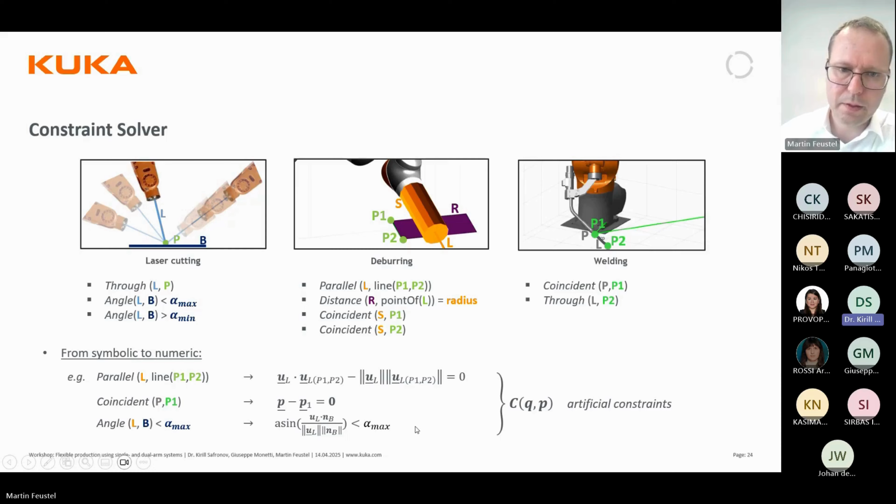There are others, and if we, for example, have this angle constraint here, then we convert it to A sin and say it's A max. And with that, this constraint goes inside our artificial constraints. With that, the solver can find a solution for us. Examples of that are multiple ones here. So here we have some deeper use cases. I think the most interesting one is on the bottom left.

Here we want to hit with our laser beams, so move along the lines, on 2 lines at the same time. So we have here 2 laser beams, and we want to hit both of the lines. Programming this with frames, I think, is not possible the current way.

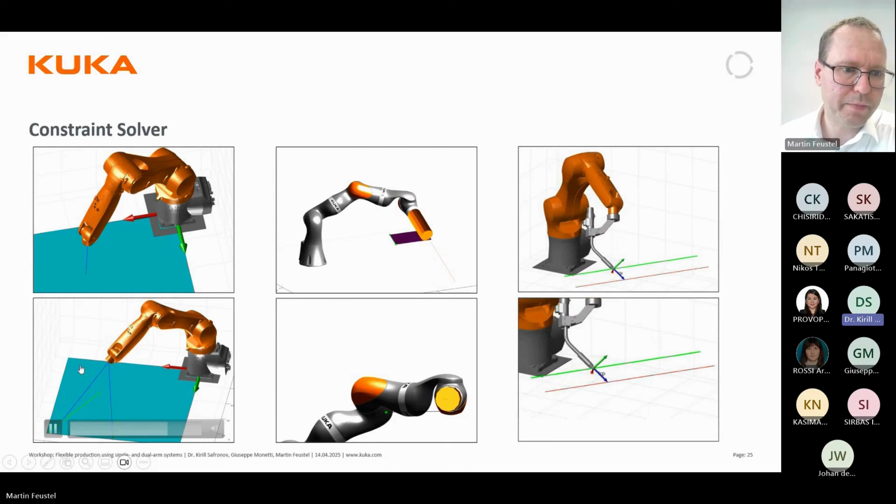So besides the geometric constraints, we have additional constraints like collision avoidance, and for that we are calculating the minimal distance between an object and a segment, and this is also put inside the QP solver. And on the right side you see a solution.

So we want to move from the left to the right, and the cylinder should be in contact with these two lines, and it's automatically avoiding obstacles. And this is done by the QP solver. And this is our constraint solver then, of course.

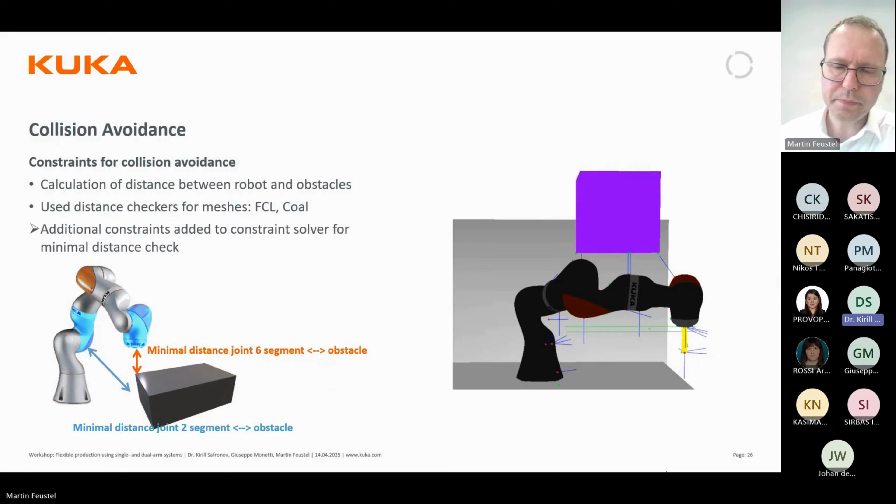So what we are doing now to improve all of that is, so planning time is an issue. So we are improving that right now. Then another challenge is to find valid solutions; we want to increase this probability with better geometric constraints, and also improve the mathematics behind our algorithms a little bit.

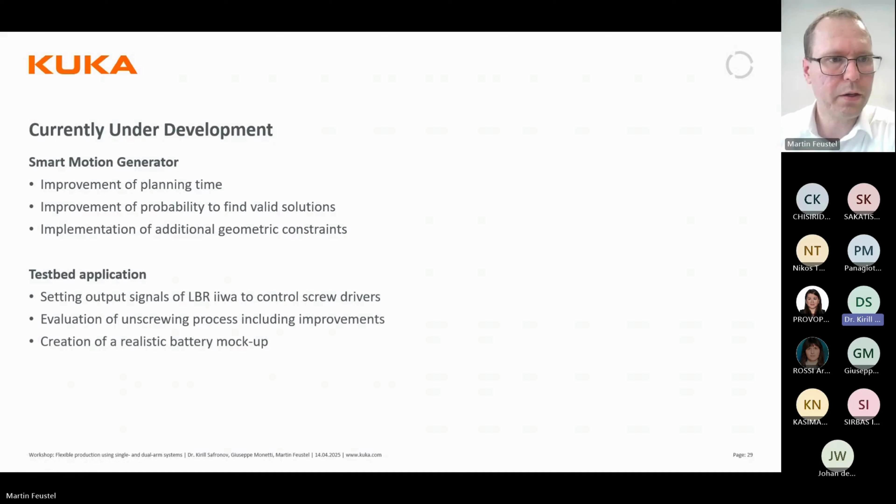Because of tolerances. So this part here is not modeled completely correctly, and then we have some tolerances of the workpiece, and that's not working. The other thing is that we don't know the exact pose where the object is placed. For that, for example, you can use FoundationPose or other 6D pose estimations Giuseppe presented today. These are the two things.

Then performance, of course, we improve that. And last thing is we are currently planning ahead, but we are not doing reactive online motion planning, so we cannot react during runtime, and we want to test if this is also possible. And for that, we have to do some verification with our algorithms if they are really real-time capable and if they can be used for motion control also.

And we have to improve our libraries so that they are hard real-time capable. Currently not, but we have to do that. So these are the open challenges.

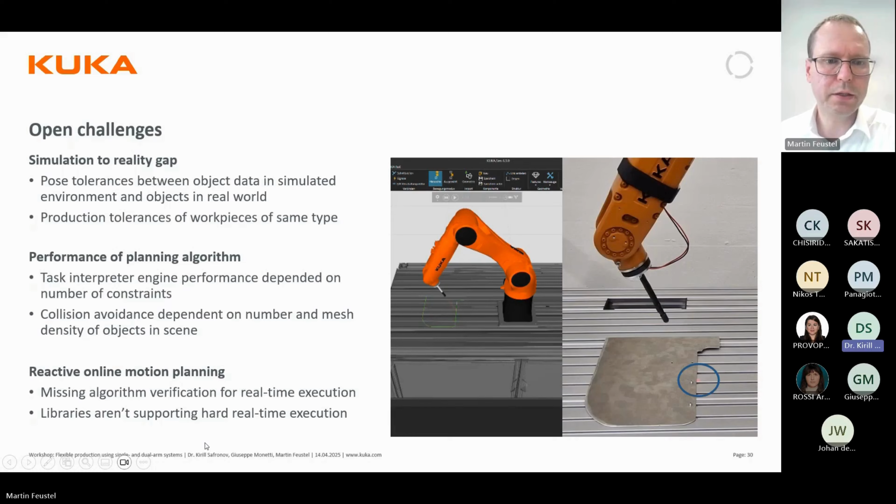So that's from my side. So what you have seen is even for an easy motion like with this screwdriver, if something changes in the environment or the screw pose is detected differently, then it could be that you're not finding some motions. And with this technology I've presented, the possibility to find motions and to be flexible is higher. So then to the Q&A session.

Kirill, do you have any questions? Thanks, Martin. So we have one question in the chat. In which real-world scenarios or industries could the test bed for unscrewing bolts be applied?

So what does it mean for the real use cases? So let's go back to this battery. What we really want to do is to first unscrew these bolts here. This is clear, but also go deeper inside. So there could be some parts inside the battery. That's why we have this long bit to go inside, so that we can also unscrew, for example, the cable holders. That's also possible at some points.

And in general, we are not limited to this battery disassembly. It's a general approach that works also in other domains of industrial production, so for our industrial use cases like deburring and so on. And yeah. Is this okay?

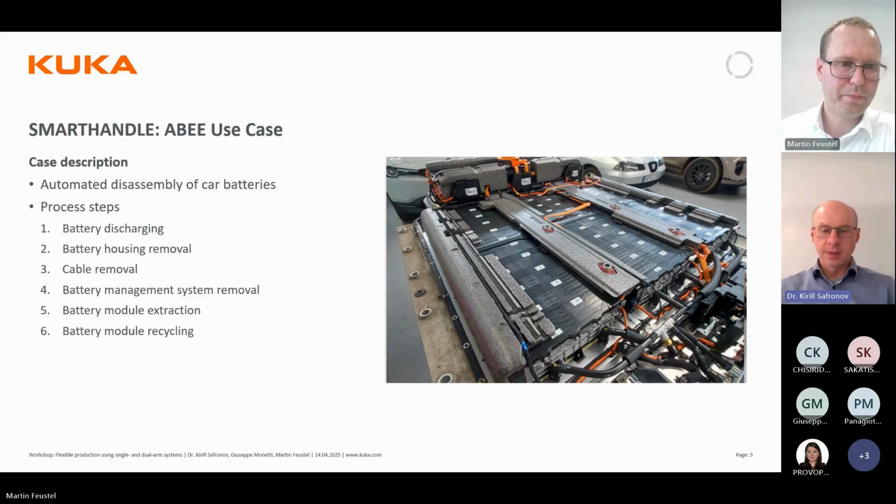Thank you. So any questions from the audience? If not, then I have some questions. So again, about the different robots. So what are the differences for your task-based programming for 6-axis robots or for 7-axis robots?

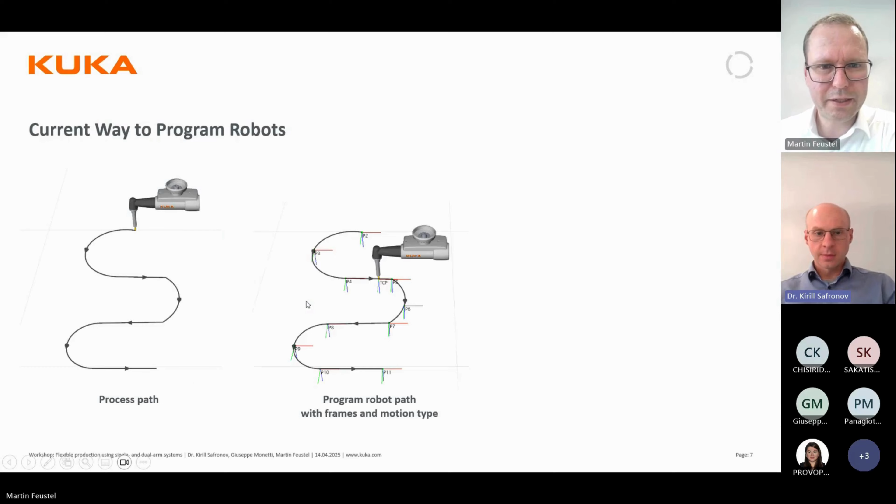So I go a little bit through the slides to explain that. Give me 1 second, then I can explain it to you directly. So what you see here is that we are independent of the robots. So we are describing the tasks in relation to a tool that's attached to a 6-axis robot, a 7-axis robot, a mobile platform, or whatever kinematic is there. So we can work on 6-axis robots, 7-axis robots, robots attached to mobile platforms, attached to linear axes, and so on. So we are really independent.

This dependence is decided at runtime. So at runtime, we have, of course, a full scene with the correct attached robot. You see it, for example, here. If you have a tool, then at runtime we have the complete scene, but at the time we are describing these tasks, only the tool is of interest.

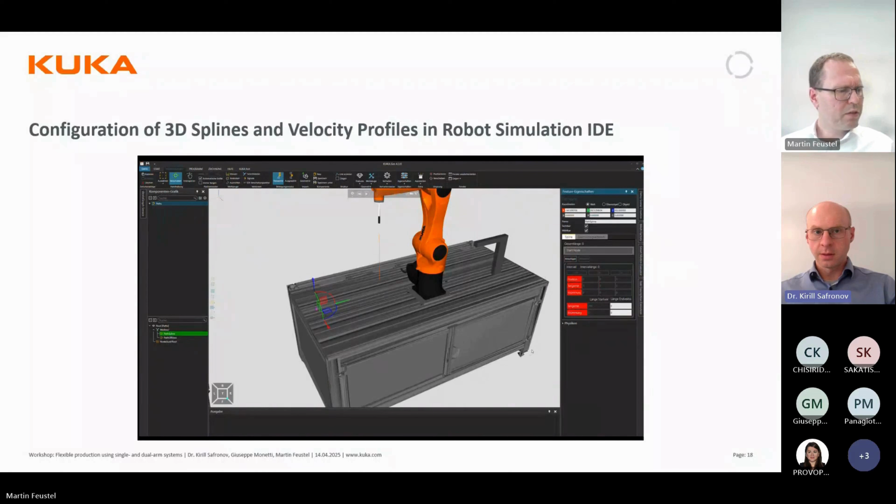So you can also consider this tool as the additional axes? I wouldn't say additional axes. The tool is there, and a tool can have, of course, additional axes. Then it's also kinematic. But in general, it's a tool-centric approach. We are describing the process in relation to a tool, and how the tool is attached to the kinematics is not important for us. For that, we have the algorithms to solve it and to give a joint trajectory for the kinematic. Yeah, thanks.

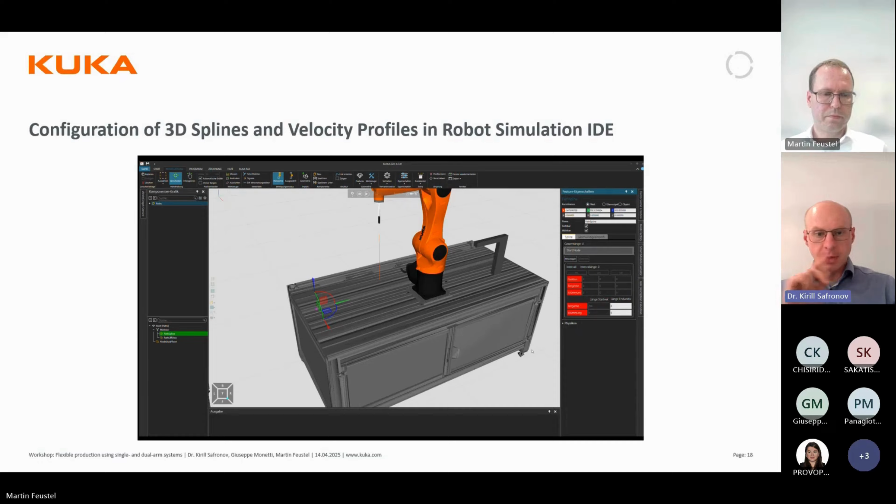And you showed also on slide 28, there was an obstacle on the laser line. So is it real-time obstacle avoidance? No. As I said, we are currently only planning it. So we had in CAD also this obstacle here, and with that, we are only planning it. If you're now using your hand and move inside while it's moving, we cannot react currently. This is something we want to develop in the future. This was also in the open challenges.

But what is possible is that before you plan this motion, you can detect objects with a camera and then plan and then execute. For that use case you can use it. But if something is changing during the motion, it's not possible to detect. So no dynamic obstacles? Yes, no dynamic obstacles.

Okay, and the last question is, you mentioned performance of planning algorithms. How can you increase this performance? Like using GPU or something? So there are several things. You can parallelize them. At least some of the constraints you can parallelize. If GPU is the right thing or not, I'm not sure, because your CPU should be enough since you don't have too many constraints. If you have more constraints, GPU could be interesting, but currently we have 2, 3, 4, 5, something like that.

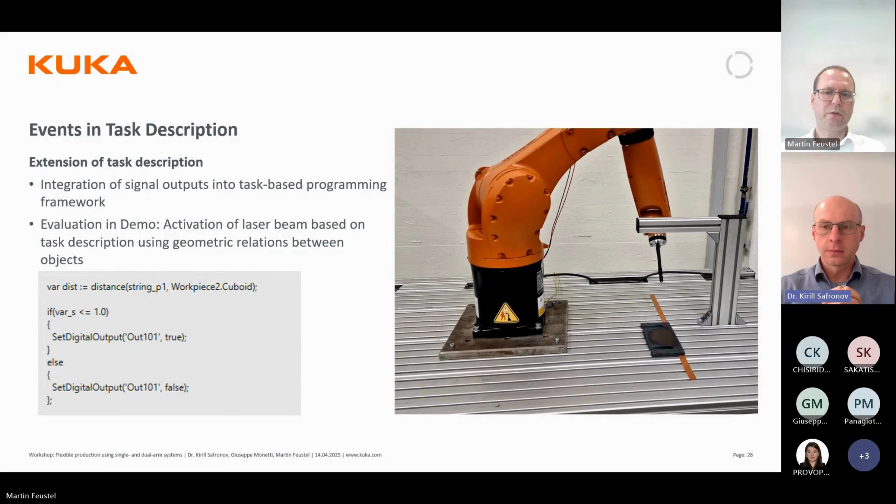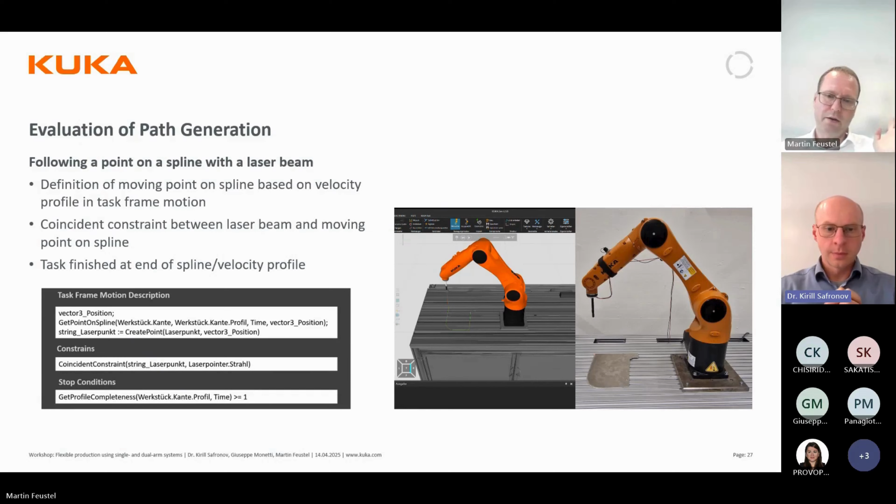Or you do the mesh-to-mesh checks on a GPU, that could be also interesting. And then perhaps it's fast enough to get it in real time, so under 4 milliseconds, for example. Okay, thank you.